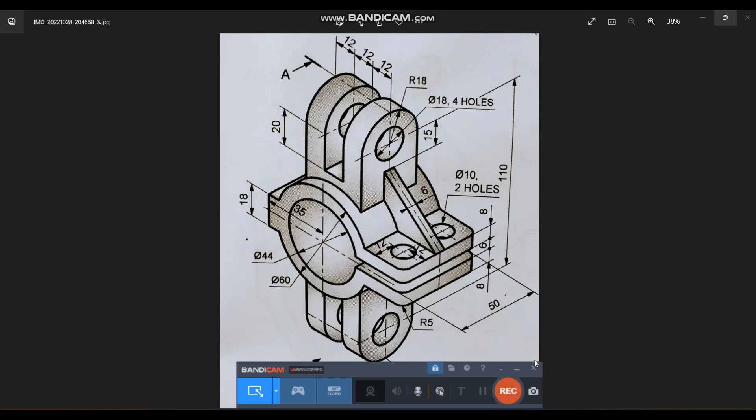Let's draw this object in SolidWorks.

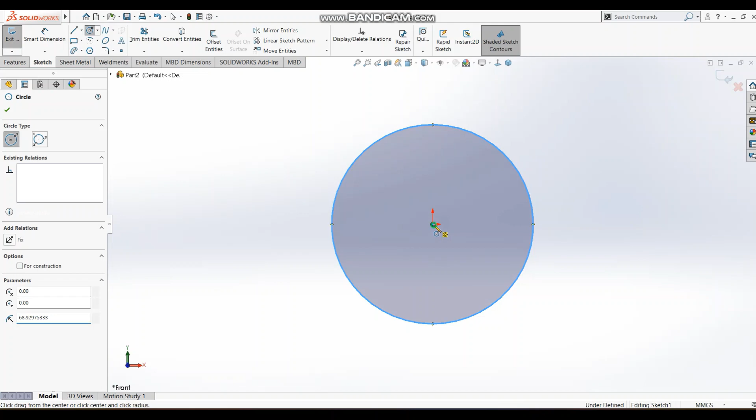Sketch on the front plane. We will sketch this circular feature first: 60 and 44 circle. Again, second circle, 60, 44. Come out of the sketch, and features extruded boss, flip side, 50 done.

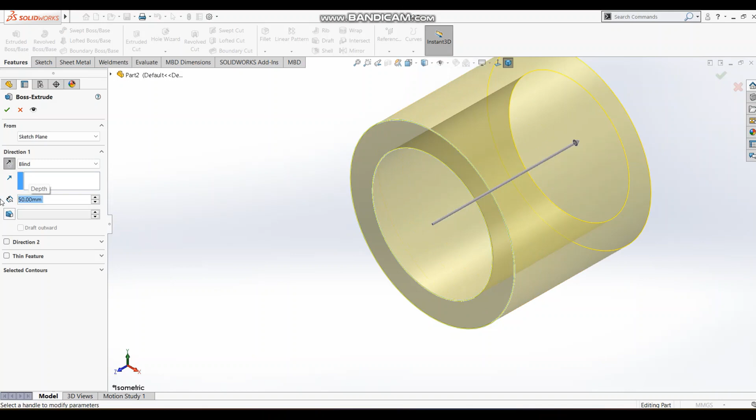Then this feature we will draw. So sketch again on this face, rectangle, center line, midpoint of this vertical line with this 0 point, and that should be the horizontal line. And also we have to specify the height of this, and that is given as 18, but we don't know this length, which is not specified here in the drawing. So let's give some value for that: 7. Looks fine.

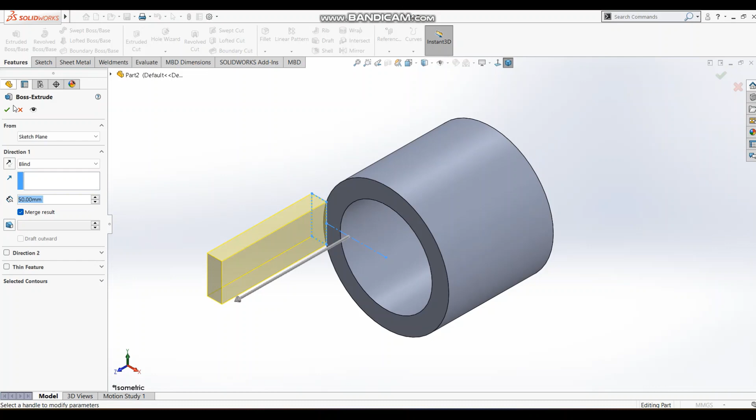Features extruded boss, flip side. From here you can say as up to surface. This surface looks good, and merge result. Click on OK command, and now you can see that these first boss feature and second boss feature are merged, so they look like a single part.

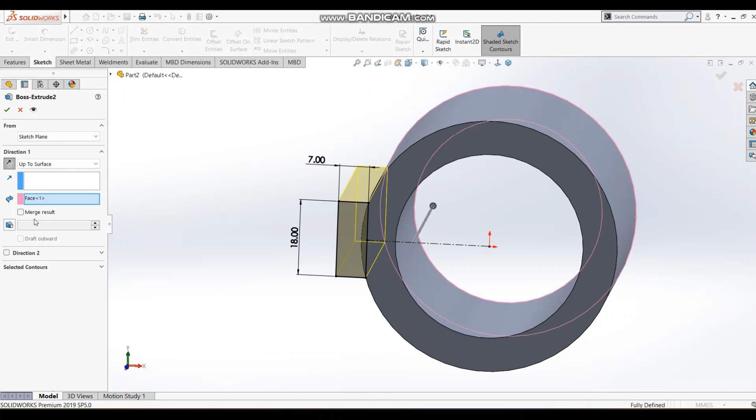If we choose the option without merge, then you can check what is happening over here. The first boss feature and second boss feature are separate, and they are not merging over here, so they will not behave as a single body. So we have to click on merge result, and now it looks like one whole solid body.

Got it? Then this side, gap in between these two is 6, flange height is 8, but I can't see the length of this flange over here. But from this we can draw this, I guess.

The center point over here is 12 from this face. Size of that hole is given here as 10, but center point from this flange is 12, and this side or this edge and the center point is not given, or the length of this feature is not given on the drawing. So let's consider it is 12 on both the sides. So from this point up to this point we can say it is 24.

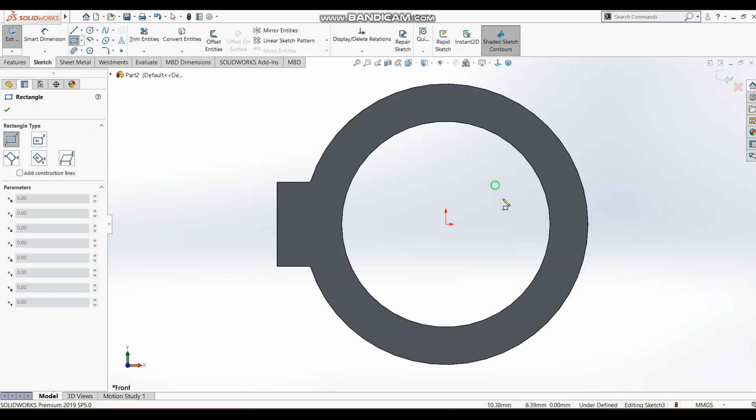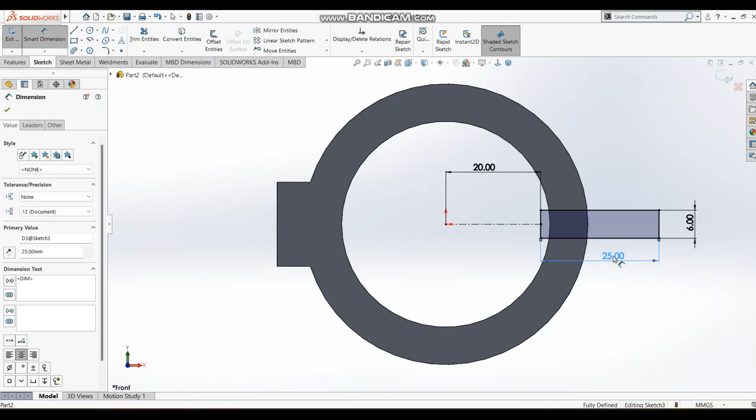Okay, let's draw. First of all, we'll go for the cutout of 6. Sketch on this face, normal to, rectangle. Again, it should be at center, so midpoint, this line should be as horizontal, and we know the height, 6. Let us say that from this is 20 and length is 25, or we can decrease this to 15. Yeah, looks fine. Coming out of the sketch, features extruded cut up to next.

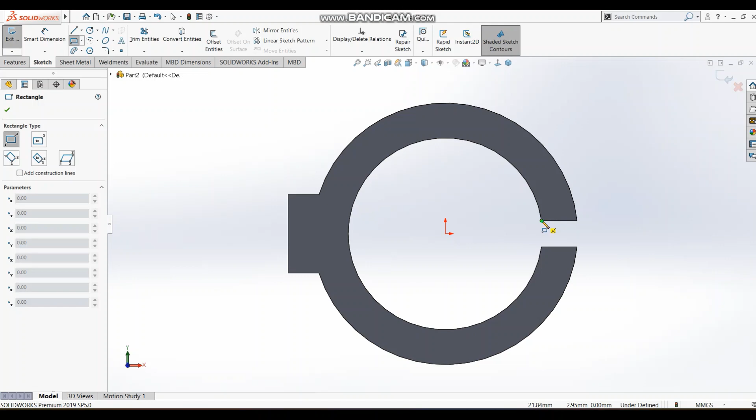Clear, that is done. Now this flange we have to draw. So sketch on this face again, normal to, rectangle. Similarly on the bottom side, and now you know the height, that is 8 mm. Similarly 8 mm here.

From this point we have to give this edge at a distance of 24. So for that, if you can draw the point on this edge and select the point and select this line and say make it coincident, now you can give the dimension from this point up to this vertical line, that is 24. Now it's completely defined. Similarly for the below side, simply we can say make collinear. This point and this point should be coincident. Now it is fully defined.

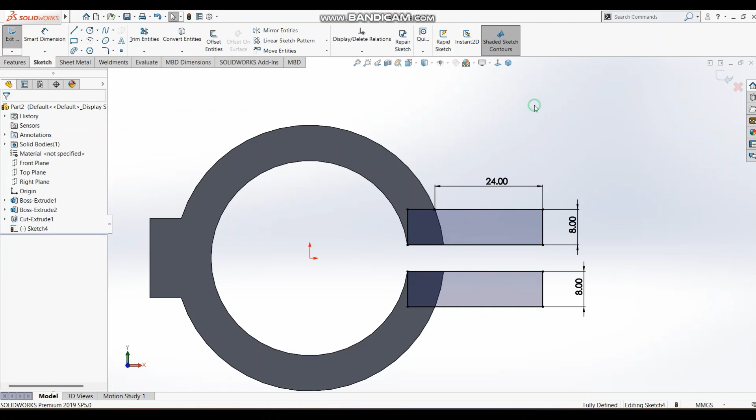Come out of the sketch command, features, extruded boss, flip side, make sure it is merge result. You can click on OK. So it looks like this now, correct? And fillet is given, radius is 10.

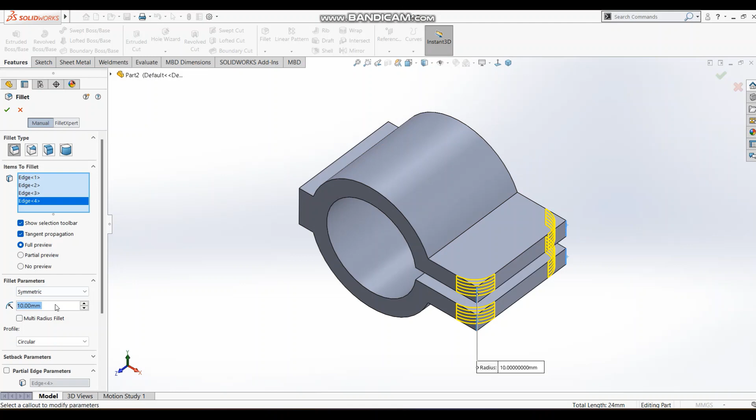Let's give the fillet command, select the edges 1, 2, 3 and 4. Radius is 10 mm. Click OK. Done. Then circles, holes.

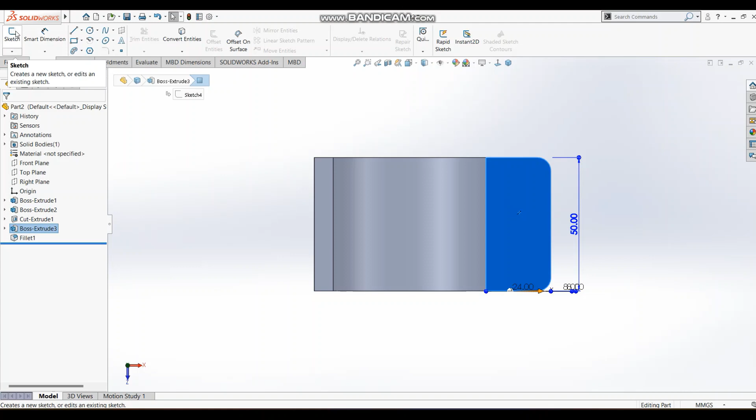Sketch on this face, sketch circle, 1 and 2. Let's connect them with the center line. Again, midpoint of this line and midpoint of this flange. Make this line as horizontal.

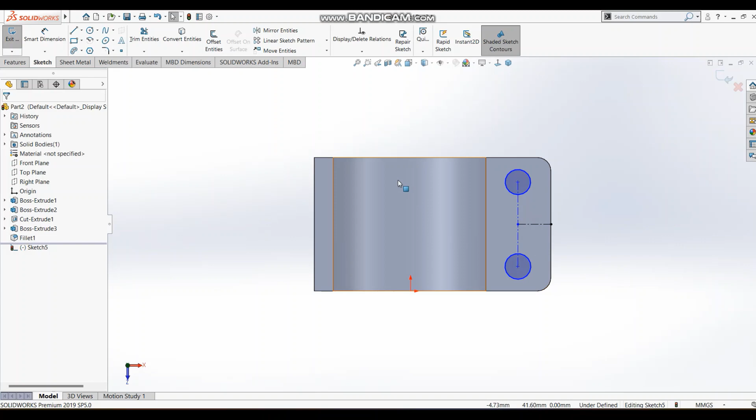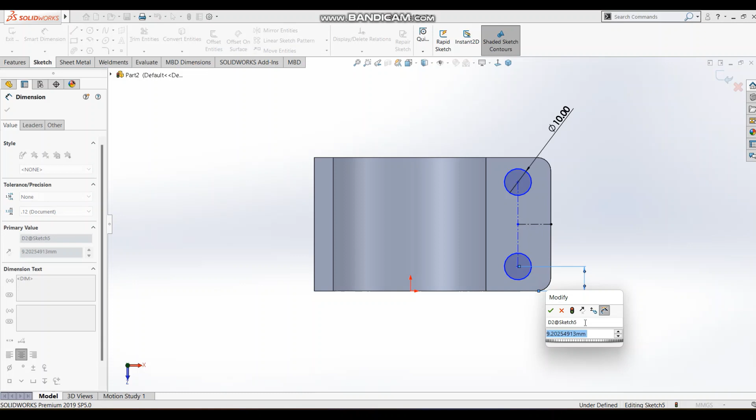Size this hole is equal to 10. Make both the holes of same size, that is make equal. And from this edge we don't know how much is the center point, but let's give it as 8 mm. Still it is not fully defined, so yes, we have to define this distance, that is 12, correct? Now it is fully defined.

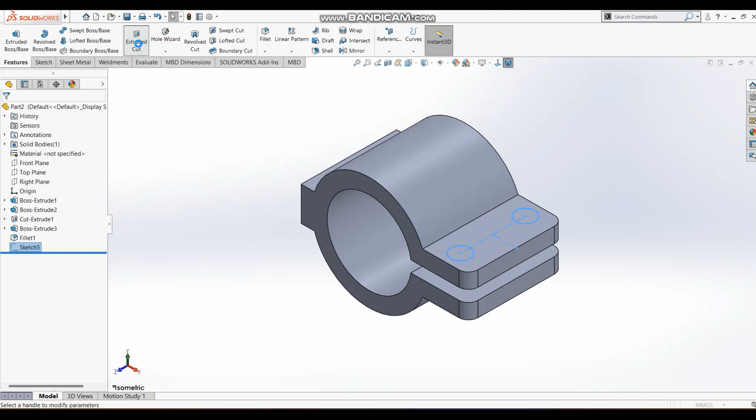Come out, features, extruded cut, up to surface, this surface. Click on OK. Done.

Now we will draw this feature on the top. For that, this is 12, 3 are 36, and height, this is 110, so we can say from center, this center point is at 55, yes, and we will draw this feature with a mid plane.

Let us proceed, sketch, sketch, and right plane, right plane. We are already in sketch.

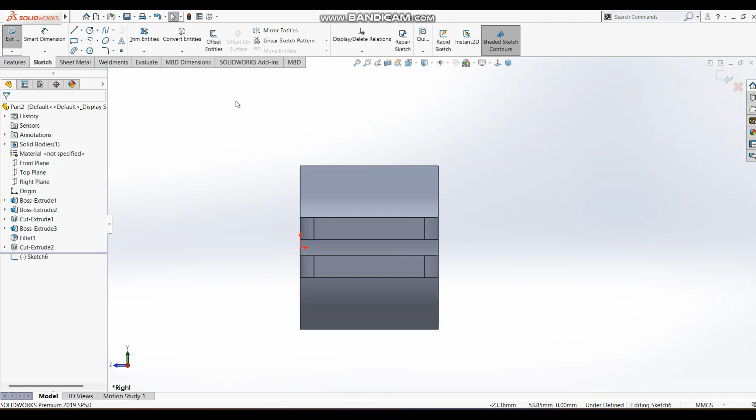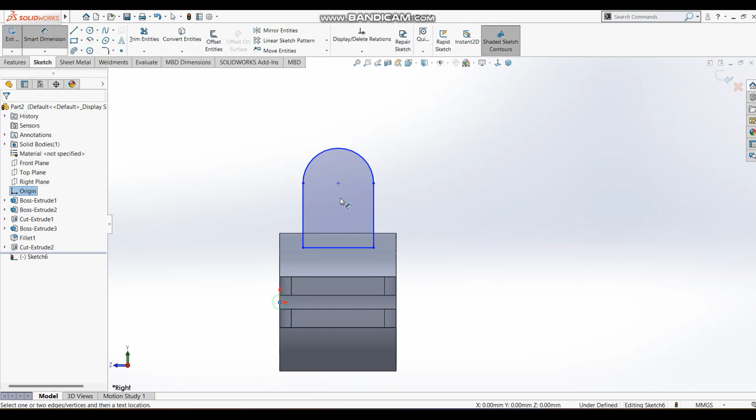Rectangle, likewise semicircle. You can trim the entities, correct? And then from center point we know this is 55, and...

Let us say that this point is, or just join this center point with this and make it as horizontal, and you know the size of this circular arc, that is R is 18, so R 18.

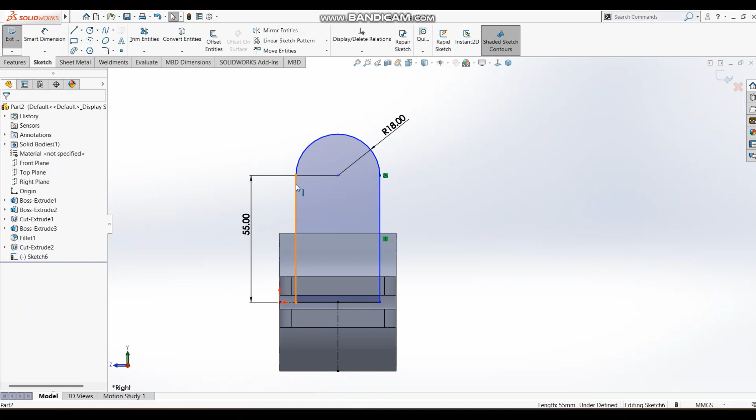Now it should be centrally located, so midpoint vertical, then that is already the tangent line. This should be tangent, and now you can see it's fully defined.

So come out of the sketch, features, extruded boss, then here you can click the option as mid plane and 36. Looks good. This is also a merge feature.

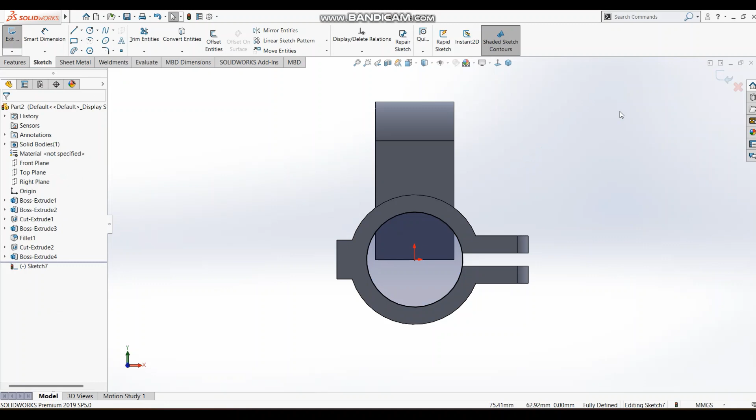Normal to extruded cut, select the face, center point and co-radial, this circle and this co-radial. Come out of the sketch, features, extruded cut, up to surface, give this surface, click on OK. You can see it's good.

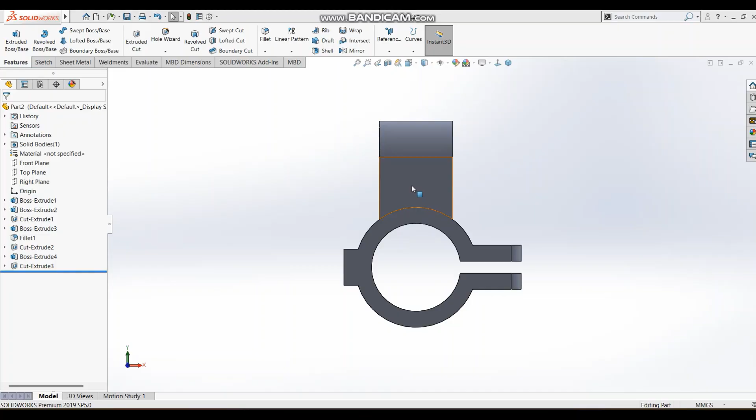Again here you have to give the cutout, so normal to, then sketch on this face, rectangle, center line, connect with the midpoint, make it vertical. This thickness is 12.

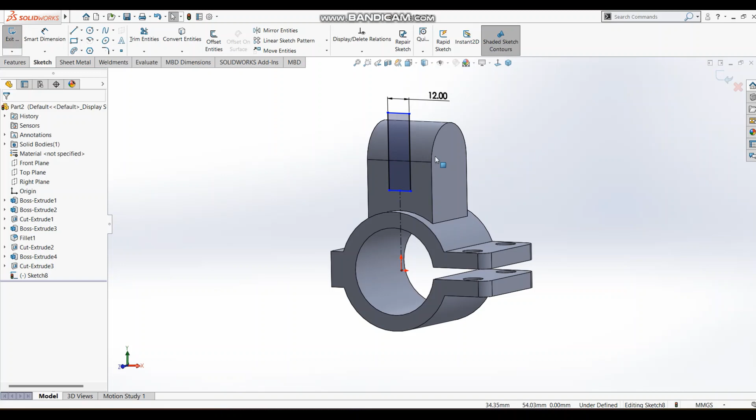Then from the center of this, from center point of this, let us check whether, yes, this is the center line. So from that center line, bottom line is at 20 mm. From center bottom is 20. That is correct, and you can simply...

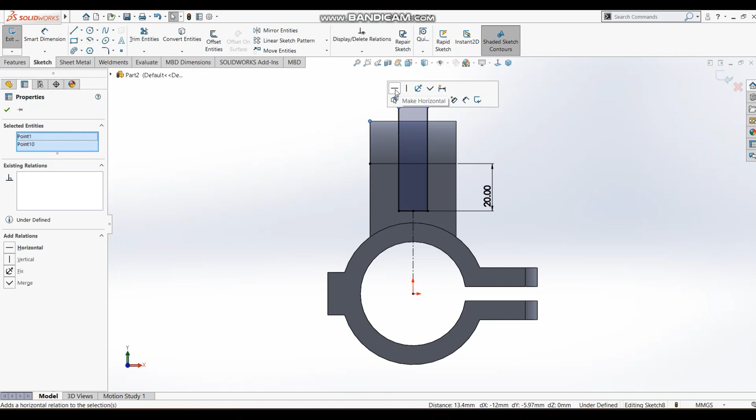Convert entities, this entity, and say it as convert entities, make it as construction geometry, and now you can see these 2 points, those should be horizontal to each other. It is fully defined. Come out of the sketch, features, extruded cut, up to surface, give this surface. Now it's done.

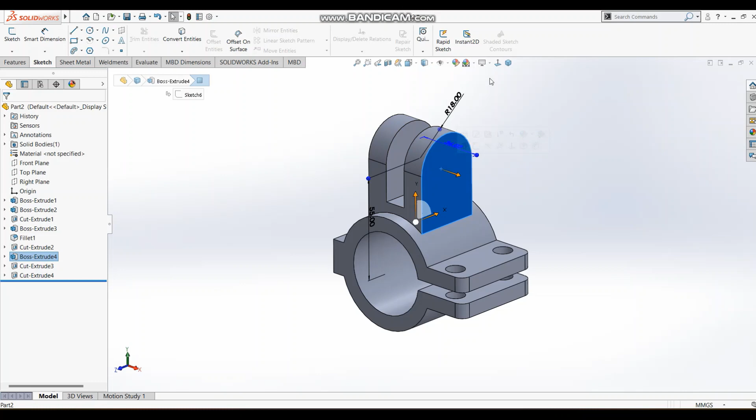Sketch on this face, circle, phi of 18. So here it is written as 4 holes, means 1, 2, 3 and 4. Diameter, that is 18.

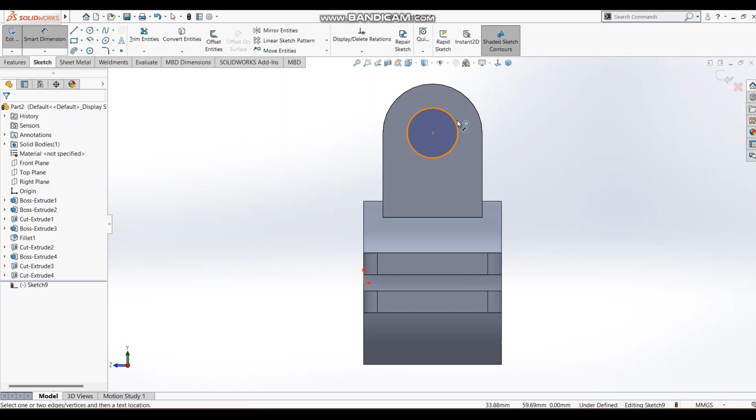Features, extruded cut, up to surface, you can give this surface, check. Okay, that is done. Similarly at the below bottom side, and we can make use of mirror features.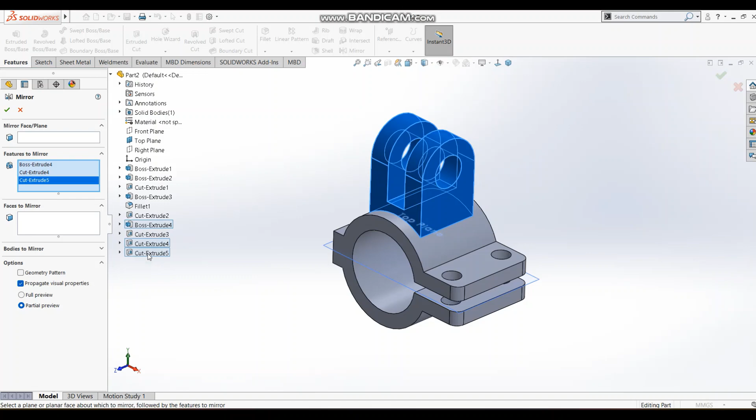I'll remove this, clear selections, this boss feature, then cutout. This cutout is not required, this cutout is required, and this cutout is also required. Mirror plane, this plane, yes, and you can click on OK. I think we have to choose this cutout as well, so feature this entity as well.

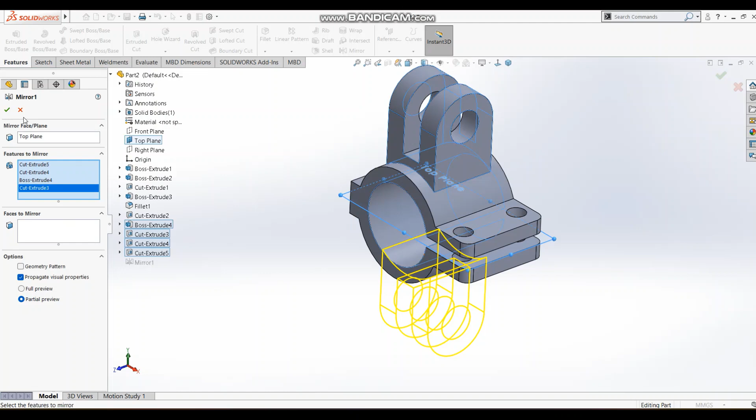Now it's good. Click on the plane, hide it. Last feature is left. This is rib, 6 mm and 15 mm from here.

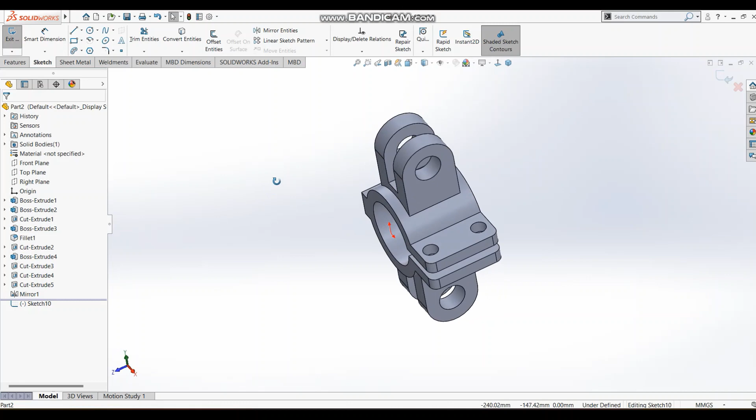Again we have to make use of mid plane. Sketch on mid plane, that is, now mid plane option we can't use with this front plane. We have to create our own.

Discard changes and exit, then features, reference plane, give the two faces. Mid plane is generated, click on OK. Plane is selected, sketch on that plane, sketch normal to, and...

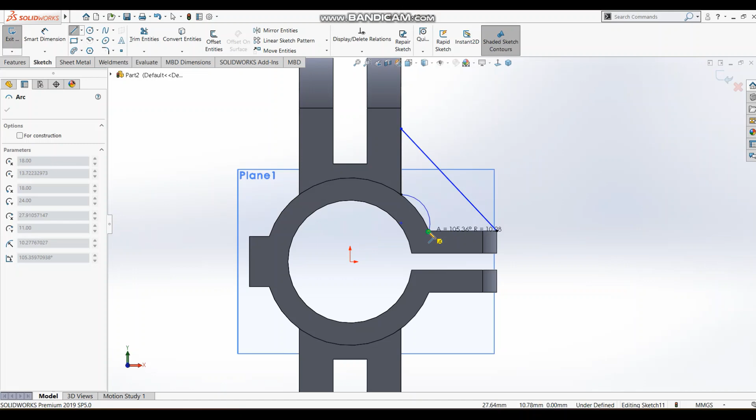We just have to connect over here, then arc, join this point here, delete this arc, convert the geometries or convert the entities, and you have to trim the part which we don't require. This arc we require, so it's fine.

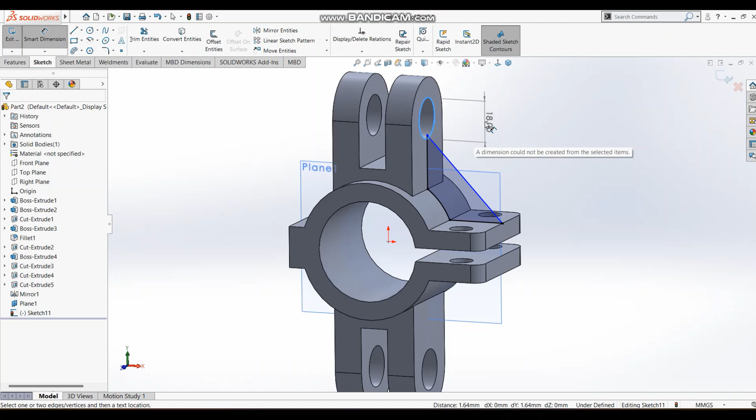And from the center of this is, center is not coming, but we know that this line is matching with the center line in this view, so you can say this as 15.

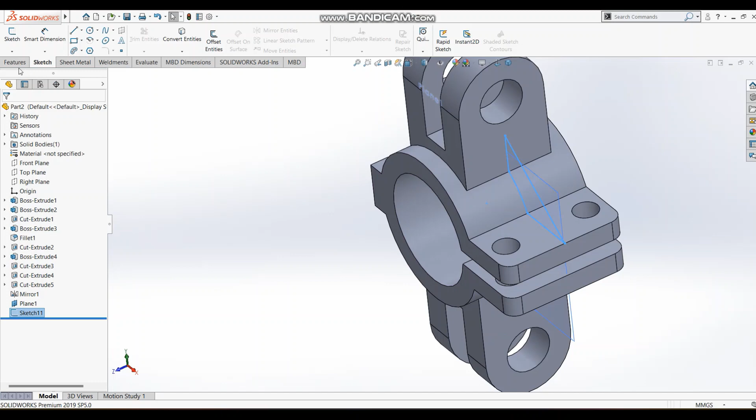Fully defined sketch, come out of the sketch, features, extruded boss, again mid plane and 6 mm, correct. Merge result, yes, click on OK, and that is also done.

You can hide this plane, and I guess we have completed the part.